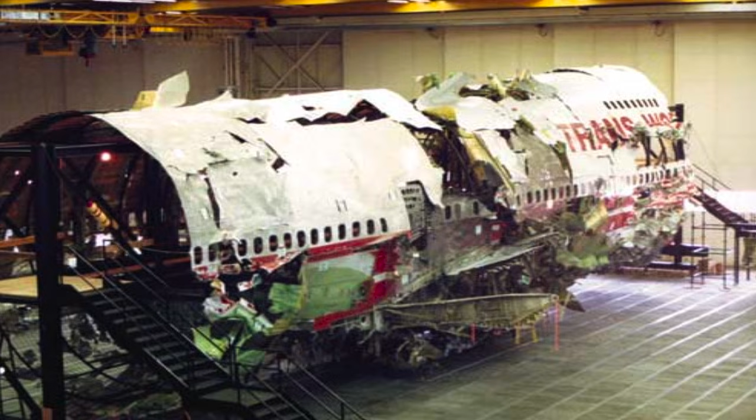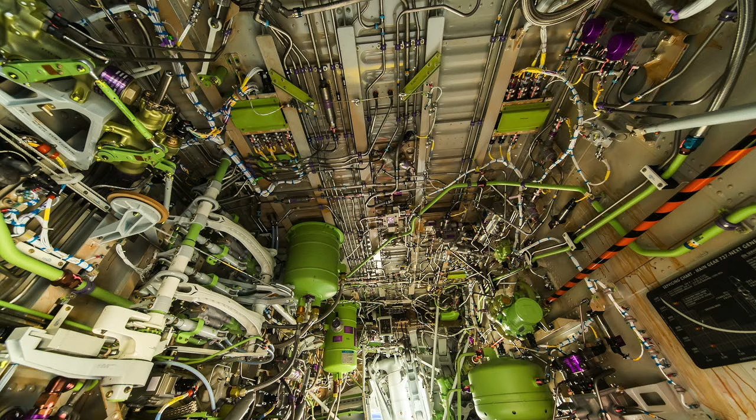The National Transportation Safety Board determined that the probable cause of the TWA Flight 800 accident was an explosion of the center wing fuel tank, the CWT, resulting from ignition of the flammable fuel-air mixture in the tank. The source of ignition energy for the explosion could not be determined with certainty, but of the sources evaluated by the investigation, the most likely was a short circuit outside of the CWT that allowed excessive voltage to enter it through electrical wiring associated with the fuel quantity indication system.

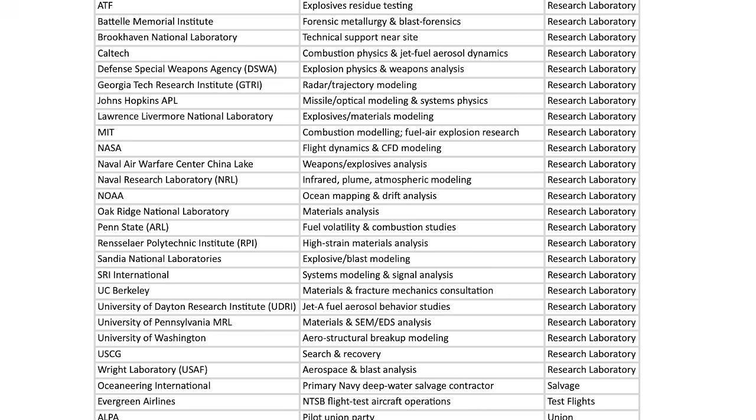The final report, which was 341 pages long, documents the NTSB accident investigation, as well as the role of the FBI and the CIA in their criminal and terrorist parallel investigations. In total, 58 organizations were involved with the investigation, and that included 25 universities and research laboratories. Aviation safety is a team effort between aircraft design, manufacturer, operation, maintenance, regulator, and accident investigators.

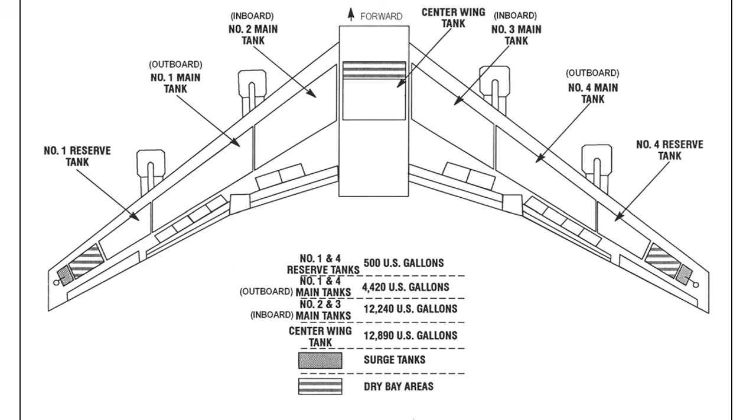Here is a disclaimer. Not all 736 FBI witness statements have been publicly released. However, the available physical, structural, and forensic evidence provides a comprehensive basis for analysis. Families of victims filed hundreds of wrongful death claims, which were settled out of court for an estimated $500 million. Subsequent Freedom of Information Act litigation has led to the release of some of the CIA and FBI material that was not publicly available at the time of the original investigation.

Aviation investigators and regulators overwhelmingly accept the center wing tank explosion as the cause of the accident. Courts have not accepted alternative causation theories, and mainstream scientific and engineering analysis is aligned with the findings of the NTSB. Some victims' family members, as well as former investigators and technical professionals, independent researchers, and journalists, continue to dispute the NTSB's probable cause determination.

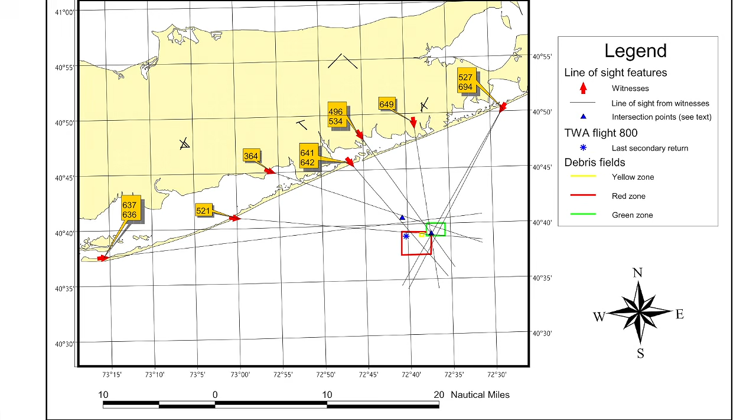The CIA produced a reconstruction to explain eyewitness reports of a rising object. That reconstruction has been debated and criticized in some quarters, but the underlying question still remains open. How do we reconcile eyewitness perception with the physical evidence?

The FBI investigation involved over 2,000 personnel and collected 736 witness statements. Many of those are from trained observers, such as military and commercial pilots. Many of those witnesses were confident they observed a rising object consistent with a missile. The investigation, therefore, had to reconcile those observations with the physical and forensic evidence recovered from the aircraft. The challenge was not to dismiss those observations, but to determine whether they were consistent with the physical evidence.

The TWA 800 investigation exposed in a very visible way that aviation safety is not a single entity's job. It's a system of interacting roles, each with different authority, incentives, and limitations. Let's break it down in a structured, system-level way. Firstly, the big picture: the aviation safety system.

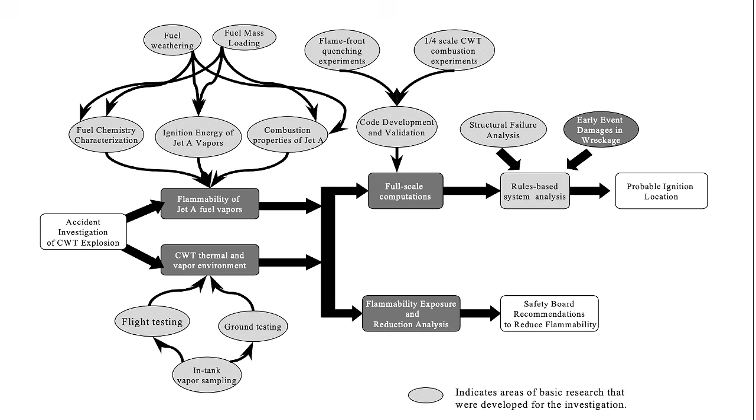The reality, as the TWA 800 accident shows, is that regulators often react to data and pressure. Many issues existed decades before the accident. There were fuel tank explosions. There was wiring degradation. And action can be slow: 13 years of history prior to the TWA 800 accident and 10 years after the accident to solve all the issues raised. It can be incremental.

There are working groups and committees with point solutions. And it can be risk-based rather than hazard elimination. You get to hear, if it is extremely unlikely, we don't need to worry about it. In TWA 800, the FAA had prior knowledge of fuel tank flammability risks, but no requirement existed to eliminate ignition risk or make fuel tanks inert.

Secondly, the investigators: NTSB, AAIB, BEA. Their primary role is to find out what happened and why, not to assign blame. Their responsibilities are to determine the probable cause of an accident, identify systemic failures, and issue safety recommendations. They analyze the design, the maintenance, the human factors, and organizational behavior. The key constraint they have is they cannot enforce anything.

The NTSB investigates accidents, issues recommendations, and evaluates the safety effectiveness of the agencies. The critical insight: investigators are the only body looking at the entire system end to end.

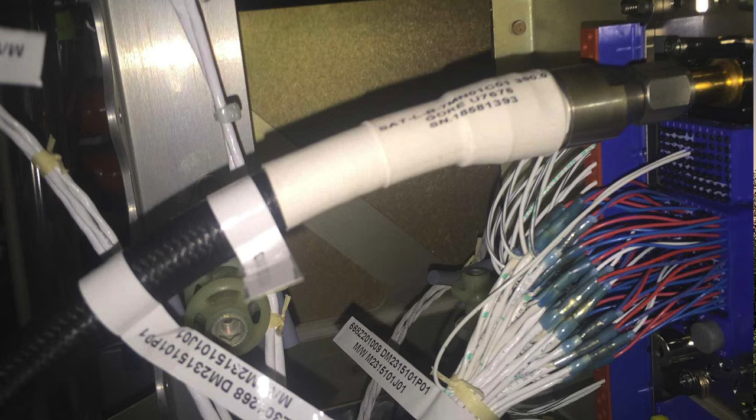Certification assumptions may become outdated, and they may miss failure modes. For example, in the case of TWA 800, aging of wiring in aircraft. The fuel tank ignition risk existed in design assumptions, and the wiring separation and protection standards were insufficient.

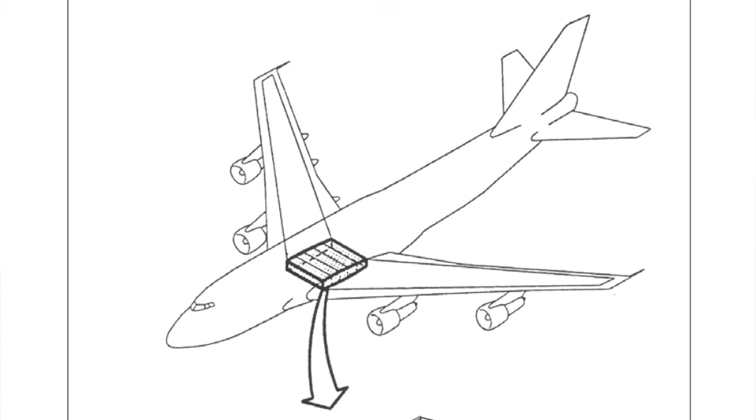Then the operators, airlines like TWA. Their primary role: to operate aircraft safely within the rules. Their responsibilities: flight operations and maintenance programs. Compliance with ADs, mandatory, and SBs, optional unless mandated. Reporting issues via SDRs, service difficulty reports. The reality: airlines operate under cost pressure and schedule pressure. Maintenance programs are approved by the regulator and often based on manufacturer guidance.

But on TWA 800, maintenance actions near the fuel quantity wiring were examined, and they reveal how routine maintenance can interact with latent design risks. So let's think about the safety information flow. This is a continuous data loop.

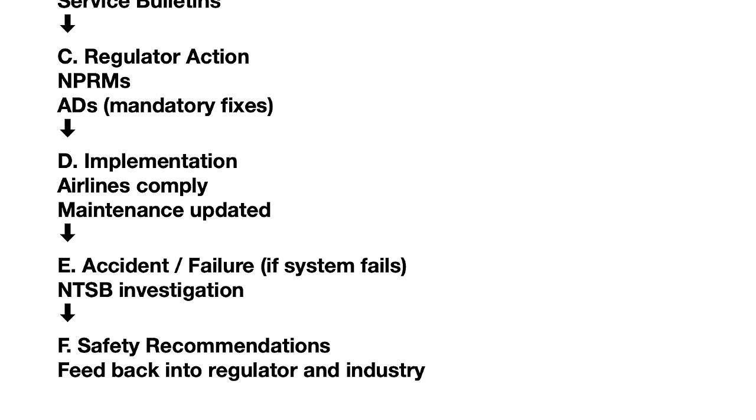Operational data from SDRs, incident reports, and airline internal findings. Manufacturer analysis and trends, and service bulletins are issued. Regulator action: NPRMs and ADs, the mandatory fixes. Implementation data: airlines comply, maintenance is updated. And then if the system fails, there is an accident and failure. So in this case, the NTSB investigation. And finally, they make safety recommendations and feedback into the regulator and the industry.

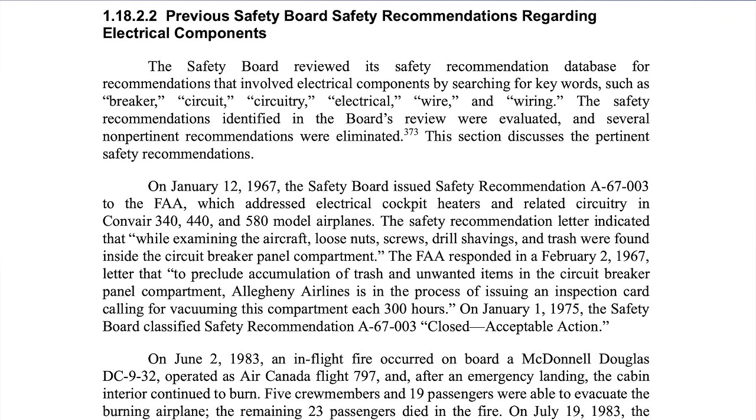So TWA 800 is actually a textbook case of why problems persist. The report shows issues dating back to 1967. Fuel tank explosions were known. Wiring degradation was known. Flammability risks were known. Yet no systemic fix until after a major accident. Why?

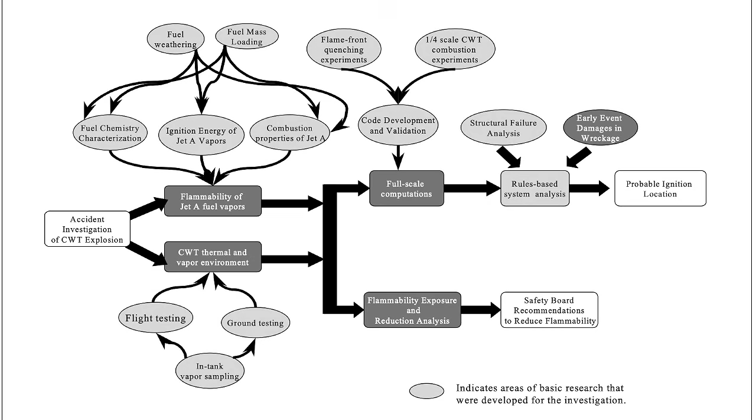First reason: responsibility and ownership. No single entity owns the hazard. The FAA regulates but doesn't design. Boeing designs but meets regulations. Airlines operate but don't redesign. And the NTSB can recommend but cannot enforce.

The second is risk normalization. Rare events are tolerated. Acceptable risk becomes embedded. Then there are economic and operational constraints. Retrofitting fleets is expensive. Changes require regulatory justification. And finally, the certification philosophy. Historically, that was prevent ignition sources. Then it changed with TWA 800. And currently, it is eliminate all flammable conditions.

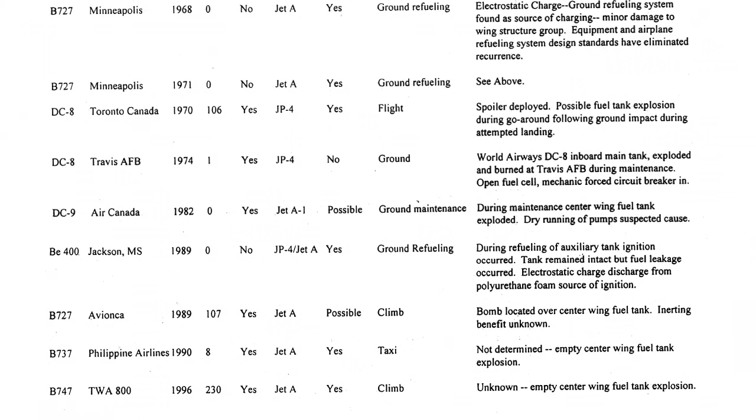And TWA 800 forced a shift. The hazard was identified in 1967, but only after 1996, when the accident happened, did regulators accept that ignition prevention alone was insufficient. By 2008, fuel tank flammability reduction, typically via nitrogen inerting, became a mandated design requirement, significantly reducing, but not eliminating, the risk.

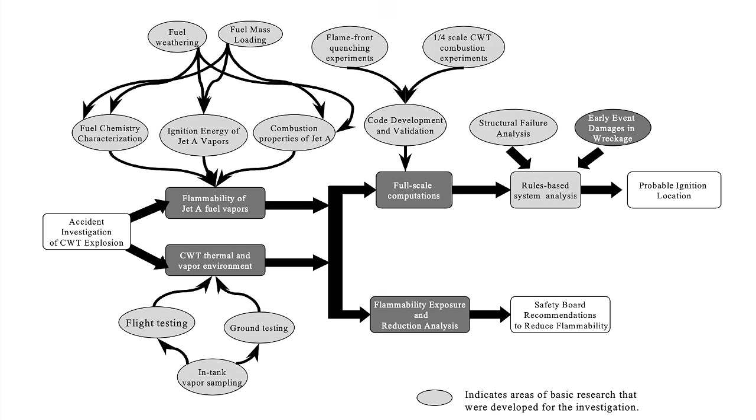So what changed after TWA 800? The investigation triggered system-level corrections. There were regulatory changes, new fuel tank safety rules, flammability reduction requirements, design changes, nitrogen inerting systems, better wiring separation and protection, maintenance changes, the aging aircraft programs were introduced, enhanced wiring inspection standards, and improved oversight, more proactive hazard identification.

The key insight from all of this: the aviation safety process can only work as a team. No single actor is sufficient. Safety emerges from the interaction of all of them. Most major accidents occur when each actor fulfills its role, but the system as a whole fails.

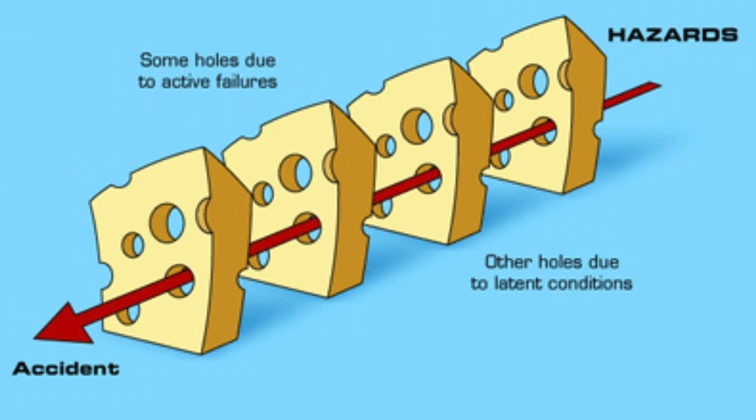Independent aircraft investigations' analysis of TWA 800 is as follows. Models like the Swiss cheese model and the black swan theory are useful, but they don't fully capture what happened here. This was not simply a random alignment of failures, nor an unforeseeable event. It was the manifestation of a known hazard that persisted across decades without a systemic solution.

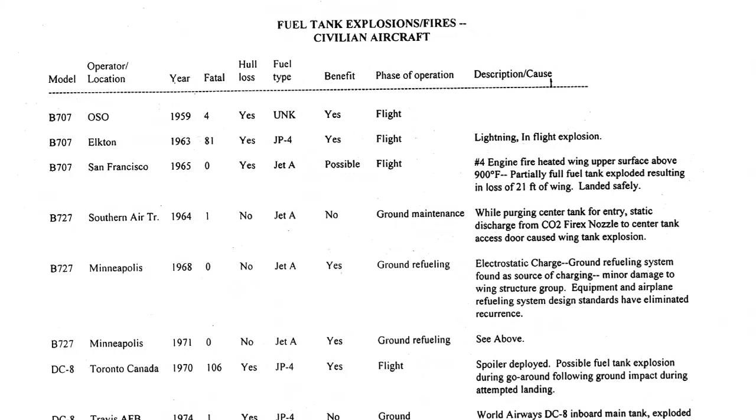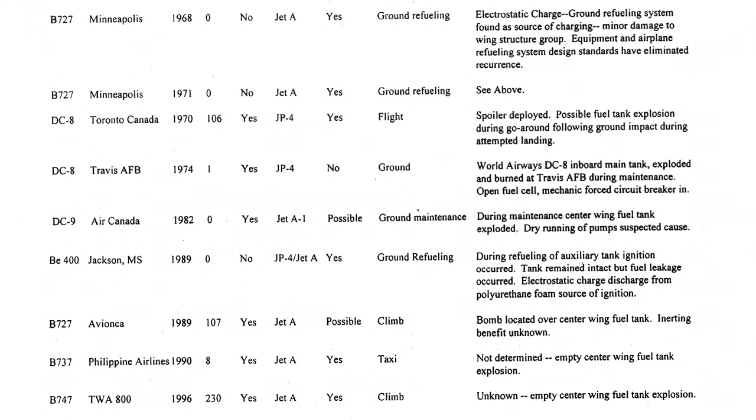Individual accidents are not predictable in their specific time, place, or aircraft. However, accident classes that arise from known hazards are both predictable and preventable. In the case of TWA Flight 800, the hazard of fuel tank explosions in transport aircraft was well known. Issues of fuel tank flammability, potential ignition sources, design assumptions, and aging wiring have been identified over decades. Therefore, while the specific accident involving TWA Flight 800 was not predictable, a fuel tank explosion of this type was both predictable and preventable. The accident represents the realization of a known system-level hazard that had not been effectively mitigated.

Let's look at the certification issues. The certification assumption was explicitly probabilistic.

Transport category aircraft certification under FAA rules like paragraph 25.901 and 25.1309 relied on the statement: ignition sources inside fuel tanks must be extremely improbable.

In practice, this meant there was no requirement to eliminate flammable mixtures and no requirement to make fuel tanks inert. There was a reliance on wiring separation, component reliability, and redundancy. So the system was built on a probability argument, not an elimination of risk. And known pre-1996 evidence contradicted that assumption. There were documented ignition-capable failures before TWA Flight 800.

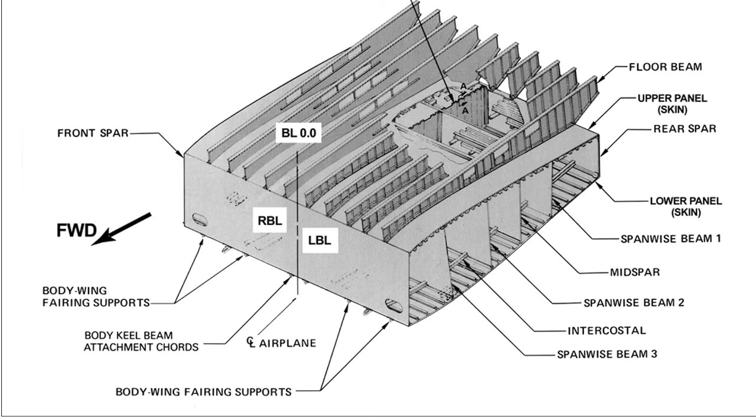Philippine Airlines Flight 143, for example, confirmed electrical energy entered a fuel tank. There were multiple service difficulty reports in the FAA database: arcing wires, fuel pump faults, indication system anomalies. These directly challenge the "extremely improbable" claim. Flammability was routine, not rare.

Center wing tanks, especially on 747s, sit above air conditioning packs, get heated during the climb, and are often partially empty. The result: the ullage is frequently within flammable range. So one leg of the triangle, the flammable mixture, was not rare at all. It was expected. Then, ignition energy thresholds are low. Jet A vapor ignition requires relatively low energy, easily achievable by wiring faults, static discharge, or pump operation anomalies. If energy ever gets into the tank, ignition is plausible.

It's not extraordinary. The system had no true independence. The probabilistic model assumed failures are independent, with barriers as separate layers. But in reality, the fuel quantity indication system (FQIS) wiring, the power wiring, and the aging insulation were often physically co-located and electrically coupled under fault conditions. This creates common cause failure paths, which invalidate the probability and multiply the risk. The risk increases dramatically.

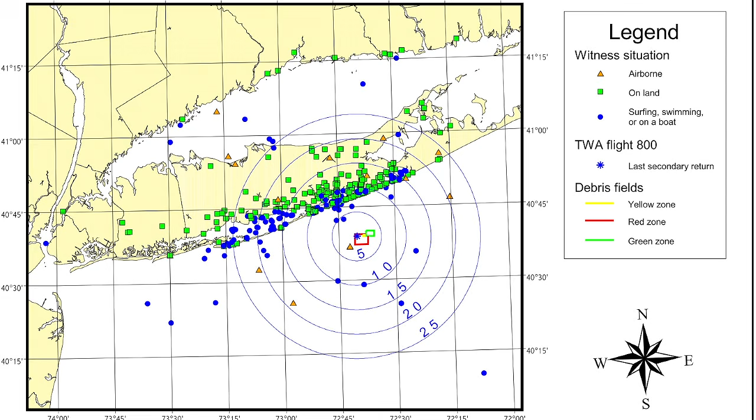The radar data from civilian aviation radar are not designed to detect missiles, but some military radars are designed for that purpose. Civilian radar data must also be interpreted carefully. Primary and secondary radar systems are not designed to reliably detect small, fast-moving objects like missile bodies, particularly at low altitudes or outside of optimal coverage. However, no radar data has been shown to provide a consistent track or signature supporting a missile engagement.

The crash area is divided into three zones: the red zone, yellow zone, and the green zone.

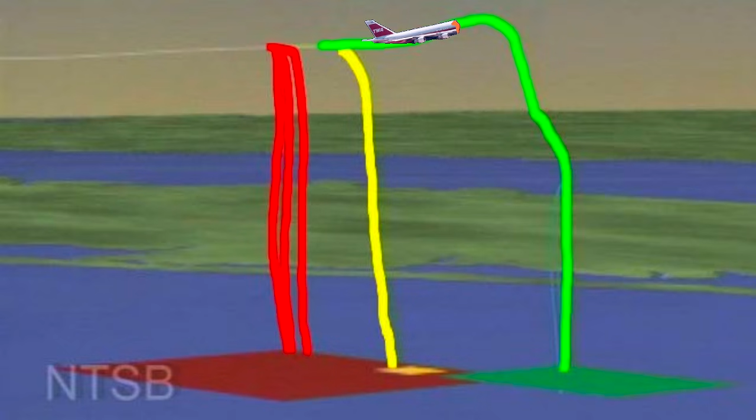The distance from the last transponder point at 40.65 degrees north, 72.67 degrees west, to the midpoint of the red zone is only 1.7709 kilometers, or 0.9562 nautical miles, on a track of 121.5 degrees true.

The distance from the last transponder point to the midpoint of the yellow zone is a bit further, 2.4661 kilometers. That's 1.3316 nautical miles on a track of 88.7 degrees true. And the distance from that last transponder point to the green zone midpoint is much further, 4.7924 kilometers, 2.5877 nautical miles, and on a track of 78.6 degrees true.

Let's have a look at the debris evidence. The initiating event was the center wing tank explosion. Subsequent breakup involved structural failure and extensive fuel-fed fire, particularly on the right wing. But the NTSB did not find that the aircraft was destroyed by a chain reaction of separate left and right wing tank explosions. There is one very noticeable feature in the debris evidence.

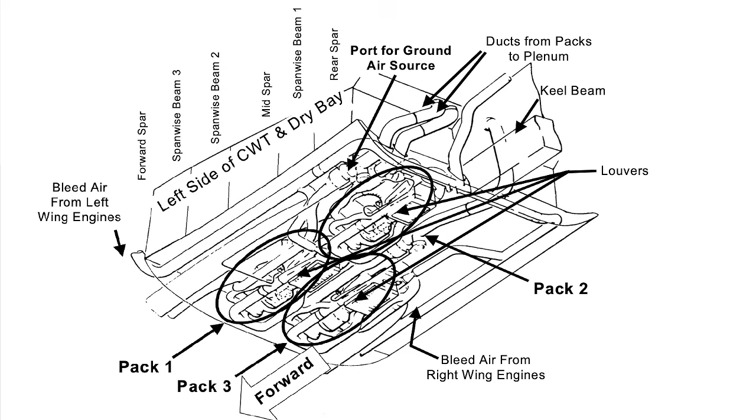The air conditioning packs, of which there are three underneath the center wing tank, Pack 1, which is on the left, and Pack 3 on the right, were found in the early red debris field, while Pack 2, the center line, was recovered from the later green main wreckage area. Given that all three packs are located directly beneath or adjacent to the center wing tank, this distribution indicates that the outboard portions of the lower fuselage separated earlier than the center structure.

This pattern is consistent with an initial structural disruption in the center wing tank and the pack bay region, with failure propagating outward across the lower fuselage. However, the exact local failure mechanism, whether dominated by explosive overpressure effects or subsequent progressive structural failure, cannot be determined from this pack distribution alone.

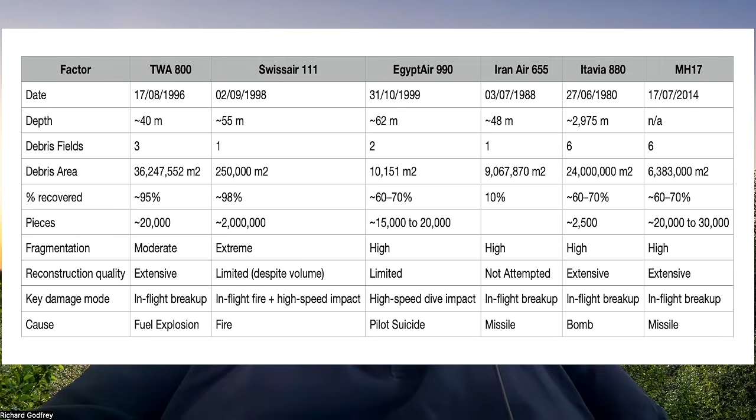Let's consider comparable events. A structured comparison of known accident cases provides a useful framework for evaluating the competing hypotheses for the destruction of TWA Flight 800. In particular, we looked at two accidents, the Itavia Flight 870 and the Malaysia Airlines Flight MH17, which illustrate the characteristic physical signatures of, respectively, an onboard explosive device and a missile warhead. These can be compared directly with the observed structural and debris evidence from TWA 800. Firstly, the internal explosive device on Itavia Flight 870.

Technical analysis of the Itavia DC-9 wreckage identified a localized region of severe structural damage centered in the rear starboard toilet. The deformation pattern showed violent outward displacement of the surrounding structure, highly localized structural distortion concentrated in a confined volume, and damage consistent with a discrete source of high energy and internal overpressure. The analysis concluded that the only explanation fitting the facts was an internal explosion, and that a missile detonation hypothesis could not explain the observed toilet area damage. This is important because it shows what a genuine onboard bomb case looks like structurally: a clear local blast seat, concentrated deformation around that point, and breakup radiating from a confined origin.

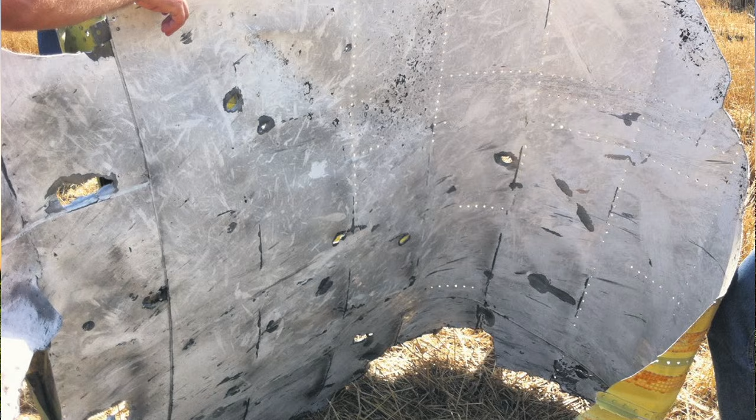Now let's consider the MH17 case. A missile warhead produces a very different signature. In a proximity fused missile event such as MH17, one expects high velocity fragment penetration, directional external to internal damage, perforation and petaling of the skin of the aircraft, and recoverable warhead fragments. The physical evidence in such cases is characteristically asymmetric in the direction of fragment travel and leaves a clear external attack signature.

Now let's consider the TWA 800 case. The physical evidence from TWA 800 differs fundamentally from both of those patterns. There is no identified missile-type fragmentation pattern, no warhead fragment signature, and no localized bomb-type blast seat comparable to the toilet-centered damage seen in the Itavia case. Instead, the debris pattern, the pack distribution, and breakup sequence are all consistent with an initial structural disruption in the center wing tank and pack bay region.

In particular, the air conditioning packs provide an important structural clue, with Packs 1 and 3 located outboard left and right, beneath or adjacent to the center wing tank, and they were found in the earlier red debris field, while Pack 2, located on the center line, remained with the later green main wreckage. This distribution indicates that the outboard portions of the lower fuselage separated before the central structure, which is consistent with an initial disruption in the centerline CWT pack bay region, followed by outward propagation across the lower fuselage.

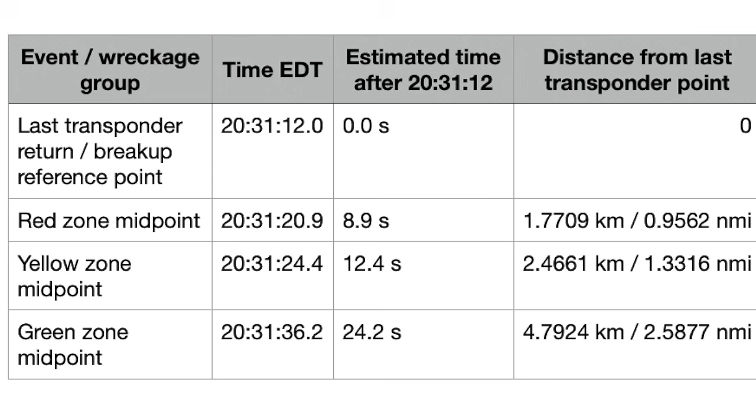Let's have a look at the breakup sequence. The timing reconstruction adds an independent line of support. Using the last transponder return as the breakup reference point at 20:31:12 EDT, with the aircraft at about 13,760 feet, a climb rate of 1,313 feet per minute, an estimated climb speed of about 303 knots indicated airspeed, and an estimated ground speed between 385 and 387 knots along the relevant debris tracks.

The debris field midpoints yield the following sequence. The red zone midpoint, about 20:31:20.9 EDT, or 8.9 seconds after the last transponder point. The yellow zone midpoint, about 12.4 seconds after the last transponder point. And the green zone midpoint, about 24.2 seconds after the last transponder point. This produces a coherent progression from the earliest impact, lower forward breakup debris in the red zone, then the forward fuselage and cockpit heavy debris in the yellow zone, and then the main wreckage mass in the green zone.

That sequence is consistent with an initial structural failure near the center wing tank and pack bay region. Rapid shedding of forward and outboard lower fuselage components, and continued forward travel of the main airframe mass before final impact. The timing also matters because it supports a progressive internal breakup sequence, not the pattern expected from either a missile warhead or a compact onboard bomb.

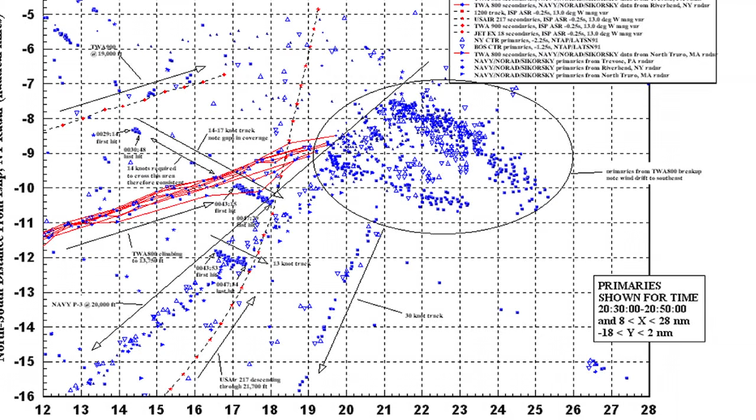A missile warhead would be expected to produce an externally imposed fragmentation pattern and an immediate directional destruction signature. A compact onboard bomb would be expected to produce a more tightly localized origin, with structural evidence concentrated around that confined blast point, as in Itavia. The TWA 800 timing and wreckage geometry instead indicate initial disruption in the center wing tank, followed by staged breakup and aerodynamic

sorting of the debris. The three cases therefore show distinct physical signatures, the mechanism and the characteristic signature. In Itavia 870, a localized blast center confines severe deformation, with breakup radiating from a discrete internal point. In MH17, fragment penetration, directional external to internal damage, perforation, petaling, and warhead fragments. And in TWA 800, a distributed structural failure in the center wing tank pack bay region, early lower fuselage breakup, no missile type fragmentation, no discrete bomb type blast seat. And TWA 800 aligns with the third pattern, not the first two.

Let's consider the question of what the witnesses saw, and there is no doubt they saw something unusual. And they did so under nighttime viewing conditions and even at a distance. The question is whether that observation is best explained by a missile or by the breakup of the aircraft itself. For both to be true, a missile strike followed by a fuel tank explosion, we would expect to see physical evidence of both events. A missile warhead produces unmistakable high-velocity fragmentation and penetration damage. Those signatures are not present in the TWA 800 wreckage.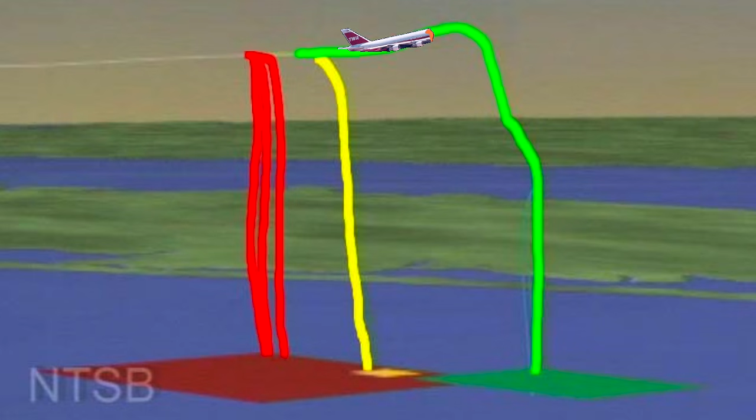So, what is our conclusion? The combined structural and kinematic evidence does not support either a missile or a bomb hypothesis for TWA 800. A missile scenario would be expected to leave clear external fragmentation and penetration signatures. A bomb scenario would be expected to leave a localized internal blast origin, analogous to the toilet-centered deformation seen in Itavia 870. Instead, TWA 800 shows a breakup sequence and debris distribution consistent with an initial structural disruption in the center wing tank, followed by outward propagation across the lower fuselage and staged in-flight breakup over the subsequent seconds.

No missile signature, no bomb signature. A known fuel tank hazard, a flammable environment, a plausible ignition pathway, and a breakup sequence consistent with an internal explosion. When all lines of evidence are considered together, they point in the same direction. Accordingly, the available evidence is most consistent with an internal fuel-air explosion in the center wing tank, and not with a missile strike or a planted bomb. If a missile had struck TWA 800, the wreckage would show unmistakable high-velocity fragment penetration. The available evidence does not show this.